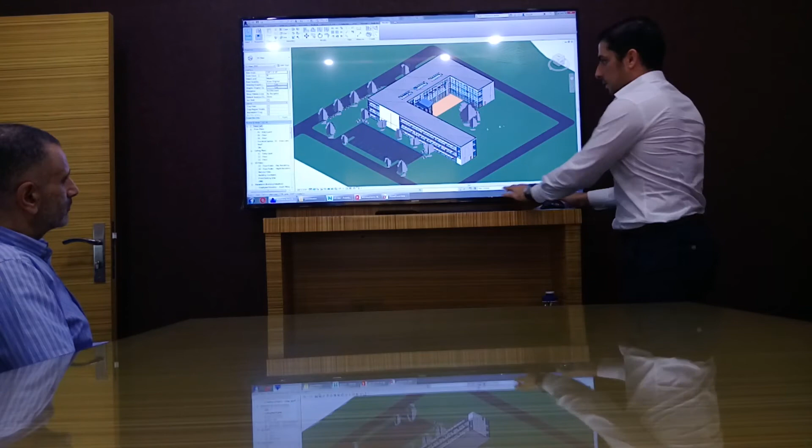So let's go to the small example I prepared. We have this building. So we have this model, built in the software. This is an elevation. This is the model. We are focusing on this particular window. Look at this window in the 3D model, here it's in the plan, this is the section through the window, and this is the elevation of the window.

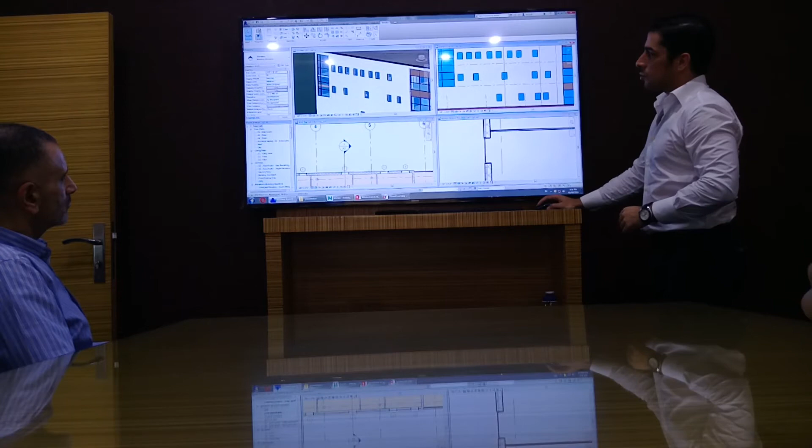So if you choose this window in any view, you see it's highlighted in the elevation, in the section, and in the plan. So we are working on the same object, but in different views. For example, I want to change the size of this window from 36 by 48 inch to 24 by 72. I am working in the 3D view.

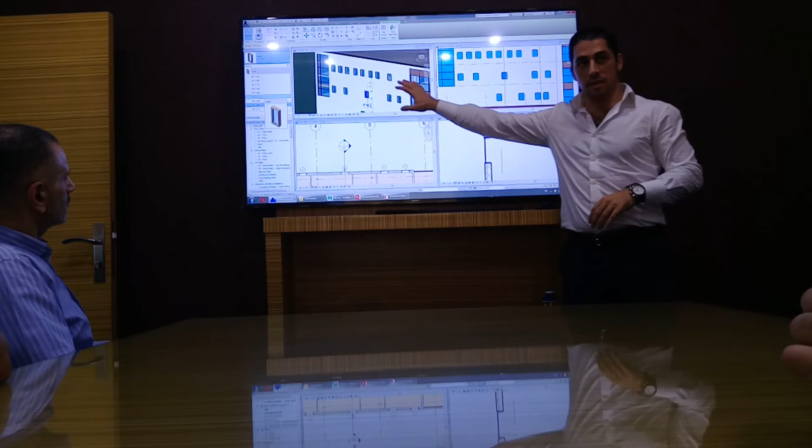So what happens is it changed in all the views. See, in the plan, the width changed. In the 3D, in the elevation, and in the section. So you don't need to worry about anything. You just change it in one place, and it will appear in all places. This is only a simple example.

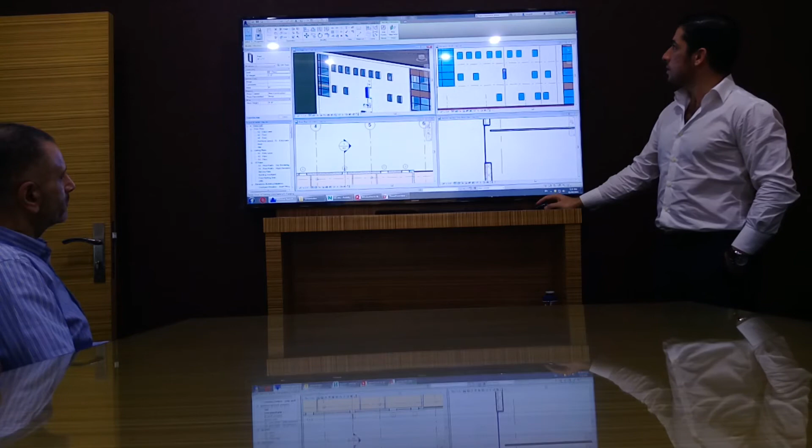Let's go back. So, our vision of BIM: how we look at BIM, what do we expect from BIM? Why do we need to implement BIM? There are a lot of reasons. First of all, what BIM will enhance for us as a design company. BIM tools will enhance our company's technology in building design, which helps us provide superior services to our clients. This is the future of design. If we follow, we will have better tools and better services to provide to our clients.

BIM will enhance coordination between all disciplines, which improves quality and reduces conflicts and inconsistency. How many times did we have problems with differences between structural and architecture, MEP and heating, sometimes clashes between all members? So in BIM, we try to avoid those problems. This is the better way in design.

BIM will enhance collaboration and communication among all team members, which improves the work environment and motivates us to work as one unit. We have a big problem here, let's face it, in our office: we don't have a lot of communication. Everybody is working on his own. Maybe some small meetings here and there, but we don't have that strong communication like in the professional way of design. So BIM will force us to do this communication and collaboration to work as one unit.

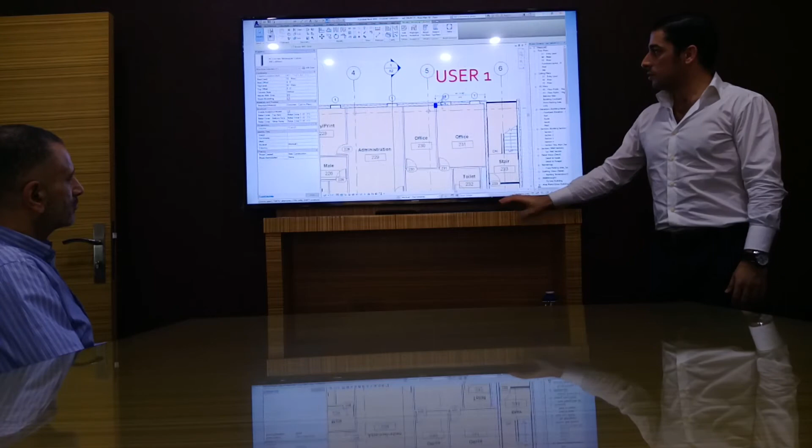And user one, let's assume he's an architect, came and shifted that column to the center of the wall, thinking that this is a better position for the column. At the same time, user two, for example a structural engineer, thought no, this column needs to be on the edge of the wall because my beam is here, I don't want it to get out of it. So user two came and moved the same column which was already moved by user one. So the program tells him, no, this is an error.

You cannot edit this element until RUBC 15, the other computer, gives you permission. So you cannot change that column. You have to call that user and discuss this with him. Or you can place a request from your model, asking him to allow you to edit that column. Once you place that request, it will tell you that your request has been placed to the user. You wait for his grant to allow you to edit it.

On user one's screen, he will see a message that a computer, for example Dima's computer, wants to edit this column. It will show the name of the column and all the information about that particular column. So will you allow him? Maybe user one thinks, no, I don't want this column here. So he will communicate with him: why do we need this? Okay, let's find a better solution. So this is the kind of communication.

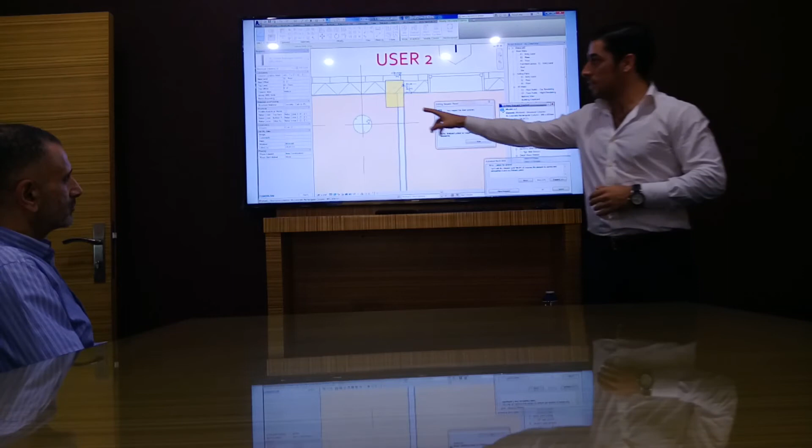Sometimes we don't worry about it, because in AutoCAD I can shift the column and let whatever happens there happen later. So if he grants it, he will allow him. Then a message: your request has been granted, you are allowed to move. Now the column is actually moved from the center to the edge. This type of communication is a very strong tool in Revit, and of course it benefits our design.

In reality, you don't need to see him. You just send him this request. If he doesn't mind, he will just grant it: okay, move it, whatever you need. Or he may suspect there's a better way, let's discuss. He will call, so we see this type of communication that we need in our design.

BIM alters vision. What will BIM replace? What will BIM change? That was enhanced vision, now alters vision. BIM will replace our traditional design method with a modern design process, which is the future of building design. That's it, BIM is the future, whether we like it or not. We have to follow.

BIM will change our organizational structure to be more organized, with clear duties where everyone is responsible for his own part. Because BIM is based on coordination, everybody knows his own part. Not like AutoCAD, where some duties are mixed between people and somebody changes what he shouldn't change. So with BIM there will be better organization, and duties will be assigned to everyone.

With BIM, we will be recognized as a professional and high-quality engineering company in the local market. For example, in Fujairah, being known as a BIM company will be a great credit for our company in front of all clients. BIM will alter the way we control contractors and suppliers, by having better control over our own design and minimizing errors and RFIs coming from the site.

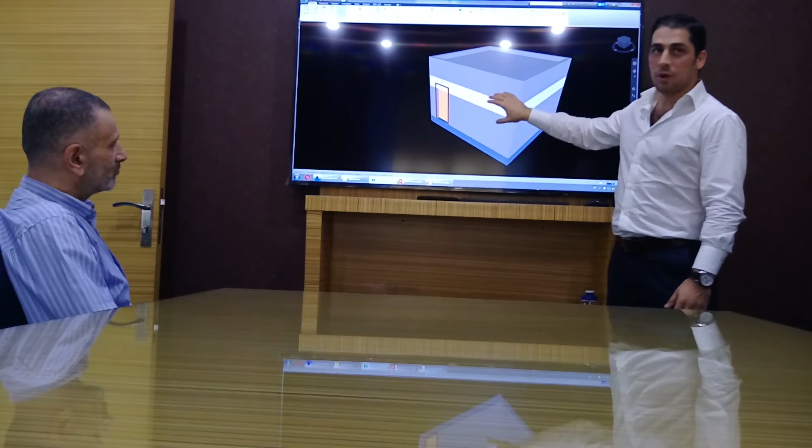Again, thanks to Dima, we have this small model, a small room. We made it in Revit and exported it to Navisworks. This is Navisworks, where we will do the clash detection. On purpose, we drew this beam to clash with the door, and we have another internal clash. Now we will see what it is. So we run the clash detection. It's here.

Now I want the program to detect the clashes between the model and itself. So whatever clashes there are, show me all of them. So I tell it to run the test. It gave me 3 clashes. The first one, if you go down, it's highlighting the beam with the window. It's written here: window and structural framing. So this is the first clash.

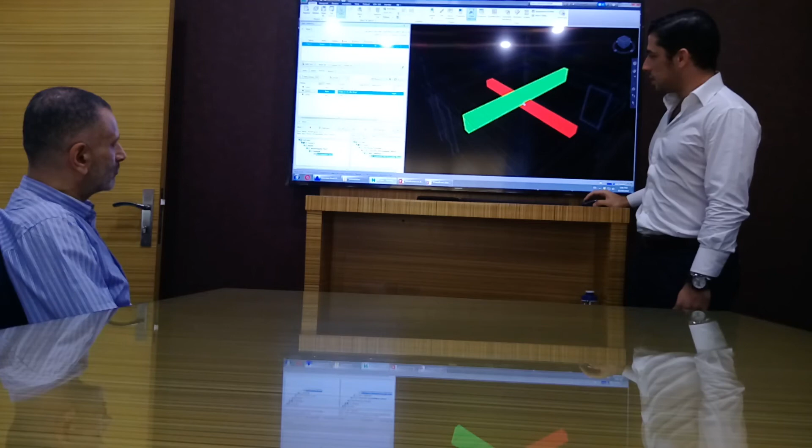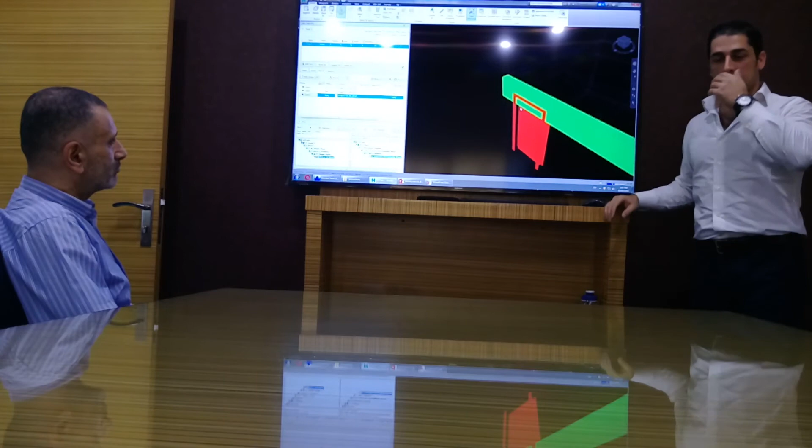And the last one is the same one with the door. The beam is clashing with the door. So this type of tool will help us to reduce or eliminate the problems or mistakes in our design. Here you request the program to show you if there's any clashing or not.

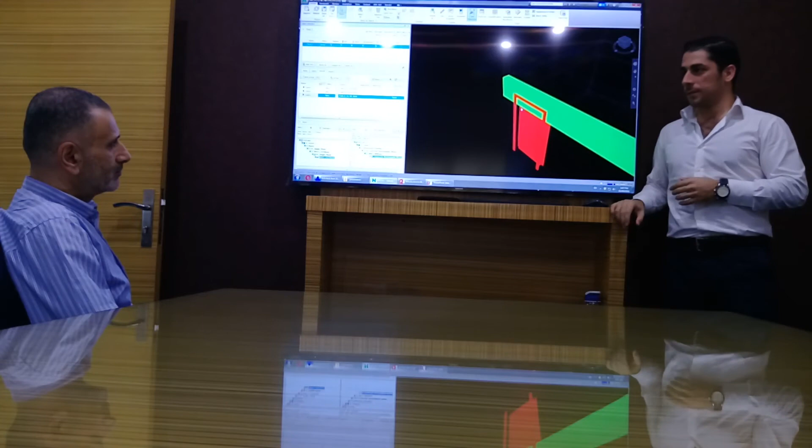I'm wondering, while you are working, will you discover that something is happening without asking the software to give you the clash? There are some cases when you draw something above something, it will tell you. But I don't know if it's able to warn you through the modeling. No, not for a beam. But if it's a wall and a wall, yes. Or a column and two walls overlapping, it will warn you inside the model. But here, no. For different parts, you have to run the clash detection.

So let's continue the goals. Increase productivity by cutting off the time needed for drafting. At first, you will need a lot of time doing that and learning the software. But once you are good in using Revit, you will decrease a lot of the time needed compared to using AutoCAD. For example, if we go back to this building.

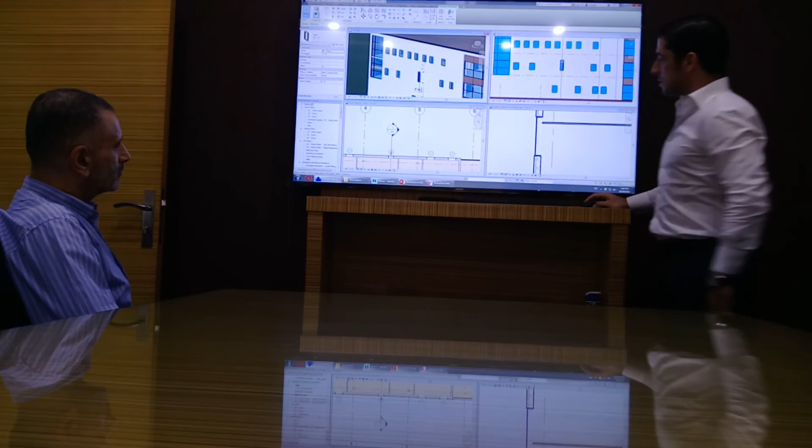For example, this one, how much time do you need to make a section from here to here? 1 day, Anish? Half day? Not half day, more than 1 day. How about doing that in 10 seconds? By telling it, I need a section from here to here, and just show me this part. How about that?

This is the section. Very nice. Section is ready. I don't need to draft. Very good. It's ready in 10 seconds. But the mouse here is sticking. Because you are building it from the beginning. Yes, once we build it, that's it. We can generate anything we need.

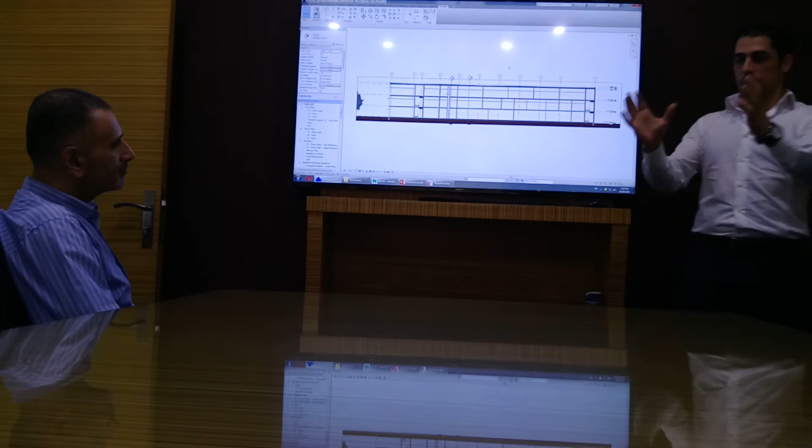Whatever you cut. And there is even a better way for sections: the 3D section. You can see the building, but you cut it in two halves. This is a better section in the future. So you can imagine how much time you save. You don't need to worry. If you change the height of the building, you change it in one view. You don't need to draw again.

How many sections did you make in the Masjid, Anish? How many sections? You don't need to say, huh? You don't need to say.

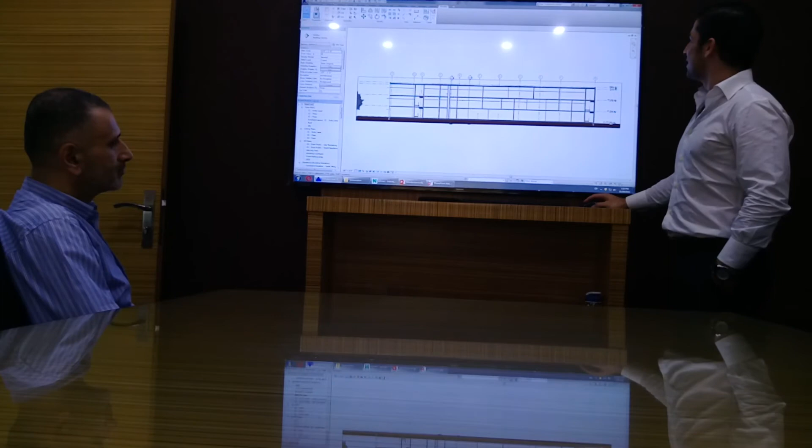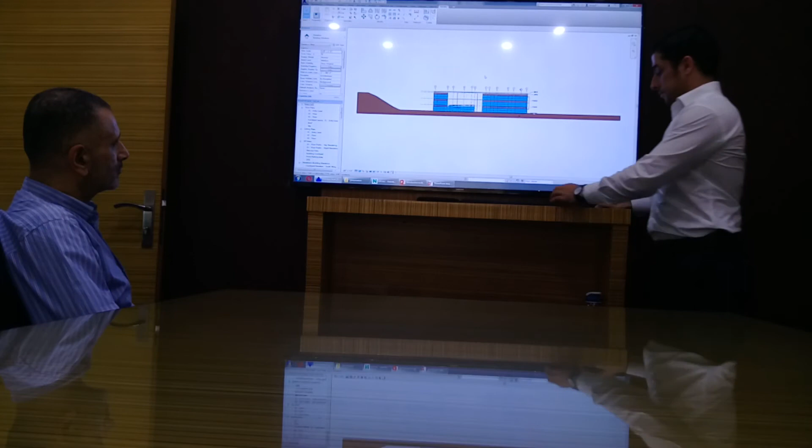So see, as many sections as you need, you can make whenever you need. And what about the elevation? There are also elevations, of course. This is not straight, but it's good. These are the elevations. They're ready. See this small rectangle, and you can replicate elevations whenever you need. You want to come here and see this elevation?

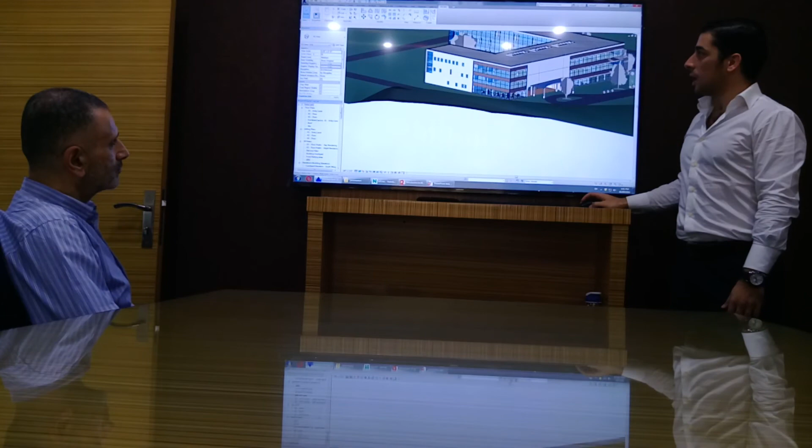And 3D also? 3D always. There is always 3D. This is the 3D building. Wow. And you can come here and tell it to do a 3D section of the building. You know how to do a 3D section? We'll see in the future. Okay? So let's go back.

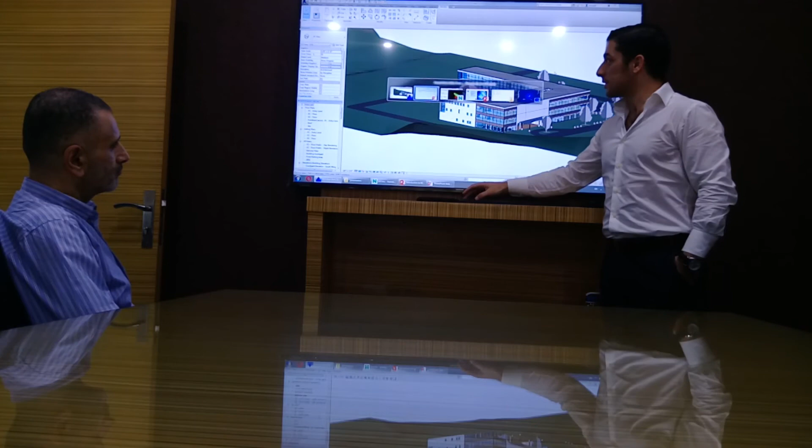I think this example is more interesting than this boring presentation. So, simplify documentation, provide new services and deliverables such as 3D sections. This is new. If we can include it in our drawings, it will be new for everybody. Rebar schedules and realistic drawings. Maybe color plans we can provide.

Improve coordination and accuracy of design deliverables. Quickly and accurately identify the implications of design change. Change is now easier than before. It's very easy. You can change and manage that change very easily. Improve staff skills. Of course, your skills will all be improved. You have a new skill.

Increase client satisfaction. Also, involving contractors and suppliers in the design process by exchanging information and construction process and equipment installation, or sending them the model if required. So from the beginning we can ask the contractor to come see the model and take his opinion about constructability of some elements. If this can be done another way, let's do it from the beginning.

This is much easier to do in 3D dimensional. Of course, in that model we can always pick up the area and know how big it is, square meters, or whatever. Any information can be generated. You don't need to calculate the quantities anymore, because when I put this wall, it will already be put in the schedule with the quantity for that. You don't need to. You just make output from that one.